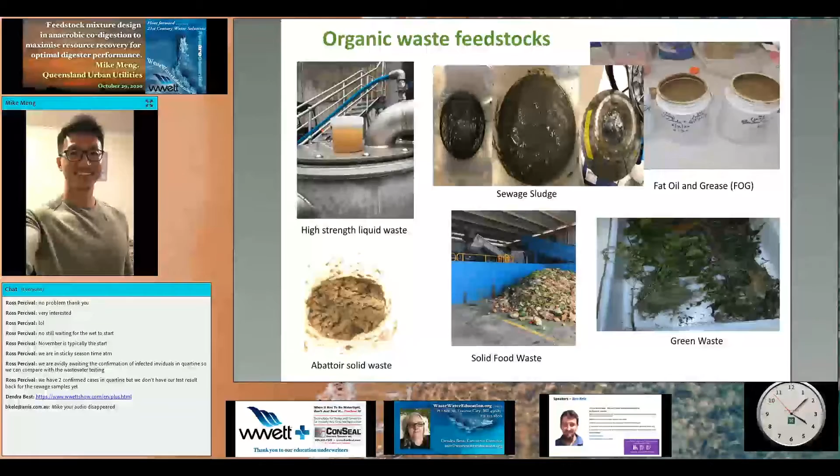And here in Queensland, we've got a lot of abattoir waste from slaughtering cows, and we've got piggery waste as well. So these wastes are all different. They all make their own in terms of composition and quantity. And we need to do something about it. So importantly, to deal with the organic wastes, we need to stabilize them, because otherwise it will cause a lot of environmental issues and they won't be used as a useful product.

Currently in Australia, according to the National Waste Report, there is about 14 million tonnes of organic waste generated each year, and 50% of the organic waste actually ends up in landfill. And interestingly, out of the 14 million tonnes of organic waste, 50% is food waste and garden organics. Like the previous slide showed, these wastes are really diverse in quantity and quality.

Many technologies exist to stabilize or treat the organic wastes. High rate anaerobic digestion, aerobic digestion, lime stabilization, conventional anaerobic digestion, composting, just to name a few. But out of these technologies, anaerobic digestion and composting are typical. Anaerobic digestion is our focus of this talk, and this is something I've done a lot of research on. Compared to composting, it is a more controlled engineering process because of the need to capture the renewable energy and the need for dealing with the downstream digested material.

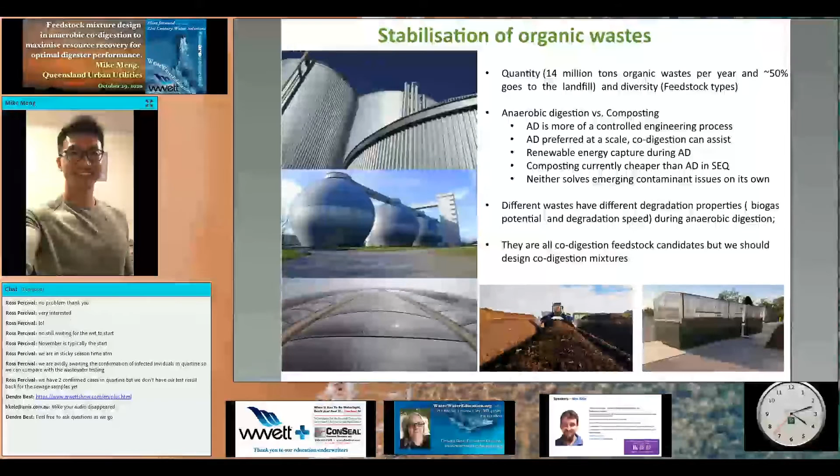In terms of anaerobic digestion, different wastes have different degradation properties, normally characterized by the gas potential and the degradation speed during an anaerobic digestion process. They are all kind of co-digestion feedstock candidates, and we need to design co-digestion mixtures to enable the best outcome possible during the digestion process. Here, I just want to briefly introduce what anaerobic digestion and co-digestion are.

So anaerobic digestion is basically a microbial process, as the image to the right shows, with colorful microbes captured. For the sake of this presentation, I won't go into too much detail about what each type of bacteria and archaea are doing in anaerobic digestion. Instead, I just want to categorize them into bacteria and archaea. They are responsible for different metabolic steps in anaerobic digestion.

So in a digestion process, there are four typical anaerobic metabolic steps: hydrolysis, acidogenesis, or interchangeably fermentation, acetogenesis, which converts organic acids into acetate, which can then be used by archaea or methanogens to be converted to methane gas. So biogas is the end product of an anaerobic digestion process, but it starts from a complex composite feedstock or substrate and goes through a series of these metabolic processes to produce the end product.

So co-digestion, as the name suggests, is a simultaneous treatment of two or more feedstocks in one centralized digestion facility. And the impact of adding an additional feedstock to a digestion process is increased organic loading rate of a process. And by doing that, when we add additional feedstock to a digestion process, if the microbial capacity of the system is fixed, the microbes have to work harder to process the waste to produce methane.

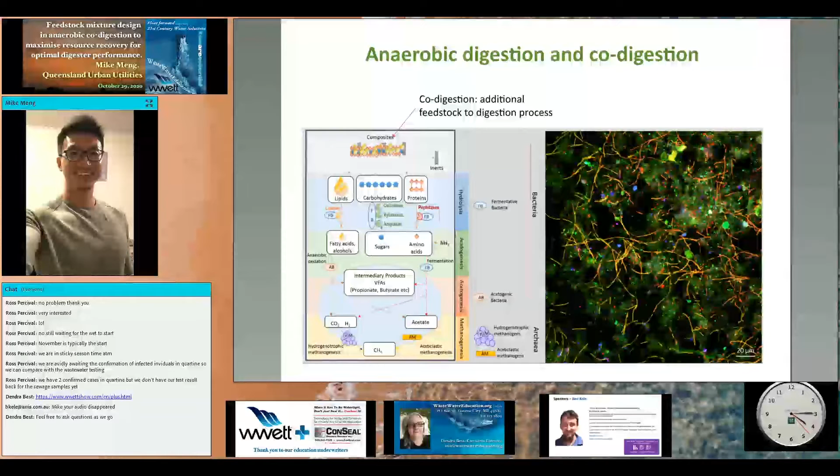And what this also means is if we add too much of the feedstock without doing co-digestion mixture design, we might overload the system. Another impact of adding additional feedstock to a digestion process is it tends to reduce the sludge retention time of a process. If we reduce it to a level where it's below the critical SRT of the system to properly stabilize the feedstock, it might have a negative impact on the microbial process and cause washout of the microbes as well. So yeah, this is an overview of the digestion and co-digestion process.

So I guess the key goal of feedstock mixture design in anaerobic co-digestion is strategic selection of different types of waste. And also sometimes when we have limited feedstock types available, because of availability issues, we need to know the optimal volume of that particular feedstock we can add to the process in order not to overload the system.

I guess the biggest advantage of co-digestion is to leverage existing infrastructure capacity of a digestion system and enhance the biogas production, which can be utilized in different ways, such as generating electricity and heat, which is a typical practice in Australia. And also there are green energy incentives in many parts of the world to use the biogas for higher value rather than just electricity.

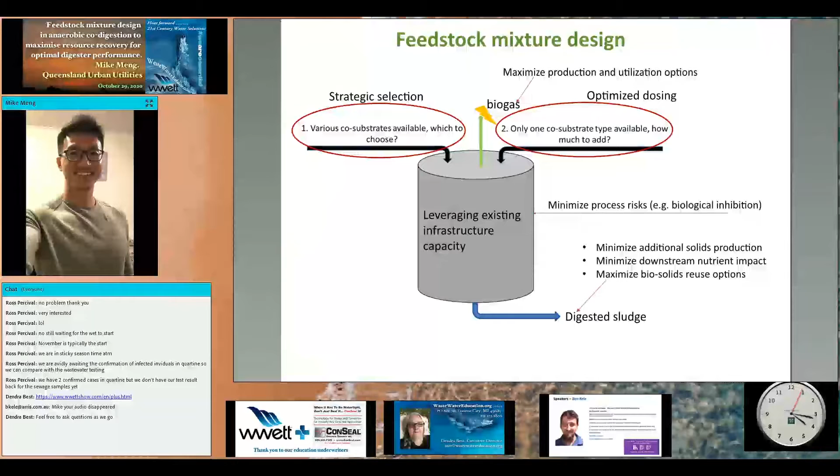So I guess the goal from the process perspective is to minimize biological inhibition risk by adding various amounts of feedstock to an existing digestion process. The goal here is to minimize additional solids production out of the digestion process. It also needs to minimize downstream nutrient impact. But at the same time, through co-digestion, we want to maximize biosolids reuse options, which is a big driver for many of the utilities here in Australia to do co-digestion. I'll give you the example a bit later on how we do it here at the utilities.

In terms of digestion speed, if we have a fixed volume of digester on site, we want to make sure the digestion speed of a feedstock is quick enough so we can achieve enough stabilization during the process. But they are very, very different from feedstock to feedstock. We definitely need to capture that dynamic nature of the substrate to make sure it's compatible with the existing operation.

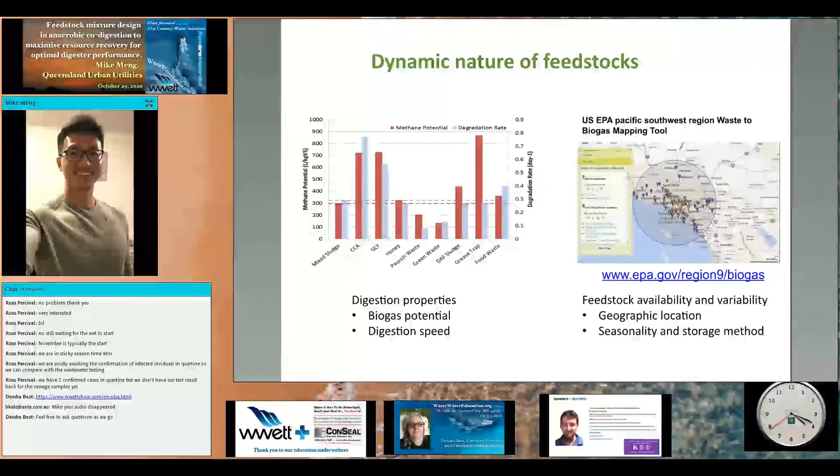And of course, seasonality is a big thing in feedstock selection, because in different seasons we have different compositions from, say, food waste. And if that food waste is stored in some way and not transported to the plant in a timely manner, it might cause a change in the feedstock composition and then change the digestion performance of that particular feedstock as well. So these are all the factors we need to consider in a co-digestion mixture design process.

Here, the diagram might look a bit complicated, but it shows the feedstock design method. I categorize the method into four key areas. So first is the substrate property management, where we try to understand what the feedstock is.

We normally do that by physical characterization. We want to measure the particle size, we want to measure how flowable the substrate is, if it's compatible with the existing operation. And we also want to quantify the chemical compositions in that feedstock. And in particular, we want to see if we can get a decent amount of biogas out of the waste.

And secondly, through the previous screening in step 1, we want to do co-digestion mixture design, because co-digestion mixture always involves adding an additional stream to the baseline substrate feed, which means we design a mixture to enable the optimal digestion process. So that's a consideration. That's where my PhD research was focused on, and we'll talk about it in more detail later.

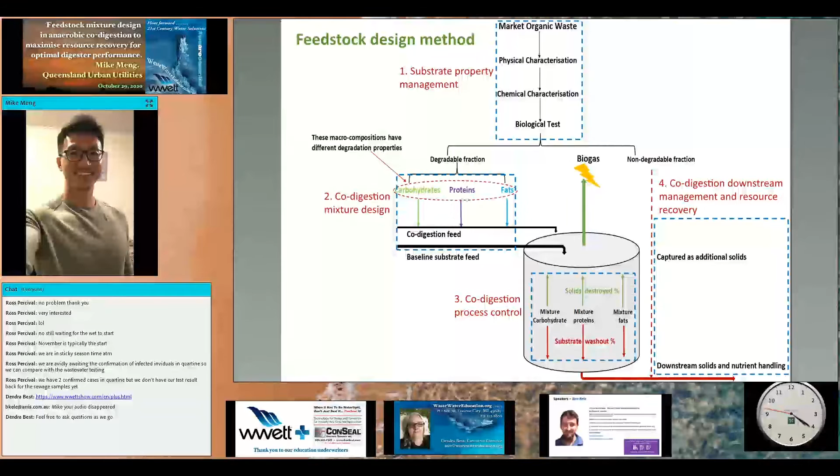And in the digestion process, what essentially happens is the designed co-digestion feedstock mixture gets destroyed and forms biogas, which is the product we want. And whatever is not destroyed will be washed out of the system and be part of the downstream solids handling process and nutrient handling process. And importantly, the degradable fraction of the waste is really important because AD, anaerobic digestion, is a biological process. Whatever portion that is non-degradable will end up in the biosolid stream as well.

Biomethane potential testing is an effective way that's widely used to quantify the biogas potential of a waste. It occurs in various sizes of sealed bottles, as the picture on the top shows. In terms of what we add to a BMP test, the graph below shows the content of a BMP test. Normally, we introduce a mass of inoculum or microbes to do the job in a BMP test. And then, depending on the ratio we want, we add a certain mass of sample. We might need to dilute it by adding a bit of water, leaving the head space for gas sampling.

So what we do in a BMP test is we periodically take a biogas sample out of the head space and run it through the gas analyzer to tell us the biogas composition and development during the test. From the BMP test, we hope we can get graphs as shown to the right. The graphs show the BMP curves from different types of waste. Again, they look very different. I just want to introduce a couple of examples from here. So, for example, the top graph,

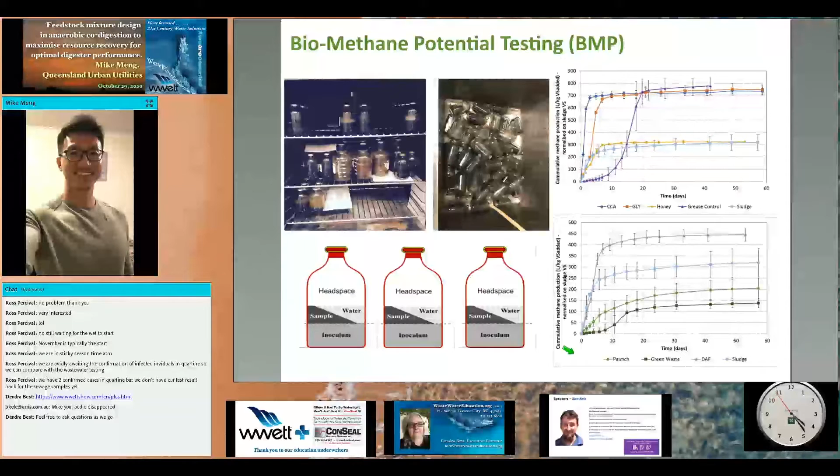I guess one matrix we look at is substrate macro compositions. So substrate macro compositions are the carbohydrate, protein, and lipid compositions in the waste. So different wastes are made of different portions of these macro compositions. They digest very differently in AD processes. For example, carbohydrates are metabolized during the AD process, forming organic acids quite quickly. And if we add too much carbohydrate in the digestion process, it tends to acidify the digestion process.

Whereas for protein, during protein digestion, it releases free ammonia, which is a known toxic material to anaerobic microbes. And too much protein in a digestion process can cause what we call free ammonia inhibition, and it can intoxicate the microbes by penetrating into the cell membranes and make them stop working.

Lipids is another important composition in waste. As well as forming organic acids during lipid digestion, it also forms something called long-chain fatty acids. It tends to be sticky onto the membrane cell wall of the microbes and inhibit the mass transfer during the digestion process. But all these different macro compositions, carbohydrates, protein, and lipids, give us a good simplified matrix to study anaerobic co-digestion processes because it's less complicated than different waste types, food waste, FOG, green waste, which are made up of these different portions of these compositions.

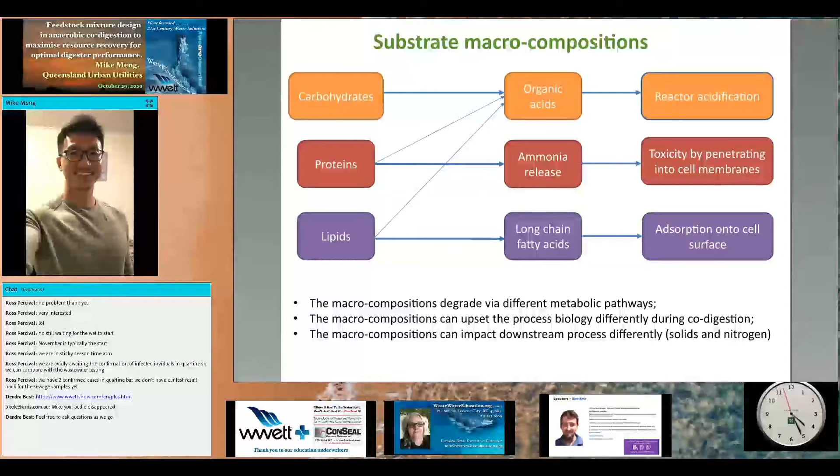In terms of how each of the macro compositions behave in a BMP test, here is a graph. So as we can see, the sewage sludge, which is the byproduct of a wastewater treatment process, has a moderate biogas production in a BMP test. Carbohydrate seems to be a little bit less than the sewage sludge in terms of the biogas production. Protein actually on its own can produce more biogas than sewage sludge, and it tends to digest faster, as shown by the slope of the curve, steeper than the red or the sewage sludge curve. But lipid is a really energy dense material that can give us a really decent amount of biogas production in the BMP test.

But again, the goal here is to quantify, if we have a complex waste added to sewage sludge, what will happen, because it's made up of a different mix of lipid, protein, carbohydrate. And the limitation of a BMP test is that it is a shock load test. As I said before, we just add a certain mass of substrate into a bottle. Whatever we add will sit in the bottle and has to be processed by the mass of the inoculum or the microbes in the bottle. If we add too much, the microbes have no choice but to take the time to adapt and process it to produce biogas.

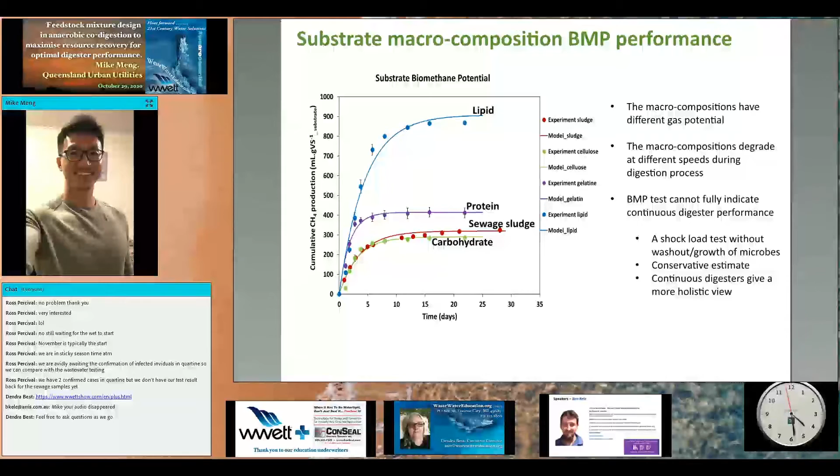So a continuous digestion trial is definitely a big part of my PhD. Here the picture shows the toys I had fun with for 650 days during my PhD. I ran these lab scale, bench scale digesters for 650 days, 4 of them. So there was one sludge digester and 3 co-digestion digesters. In the co-digestion digesters, I had the same amount of sludge substrate, and in addition to the sludge substrate, I added a controlled amount of either carbohydrate, protein, or lipid to be used as a matrix of the waste compositions.

So the goal here is to progressively overload the system to find a maximum loading rate. So for industry, it's really important to know how much of each of the feedstock we can add. Is there a sweet spot in a process where we know how much we add to maximize the profit and digestion benefit in various ways? And also from this experiment, I wanted to quantify the process impact of different macro compositions, namely carbohydrate, protein, and lipids. A big goal of this trial was also to inform industry applications. We were working with water utilities and meat industries here in Australia to tell them what feedstock would be the best type and how much to add to enable benefit.

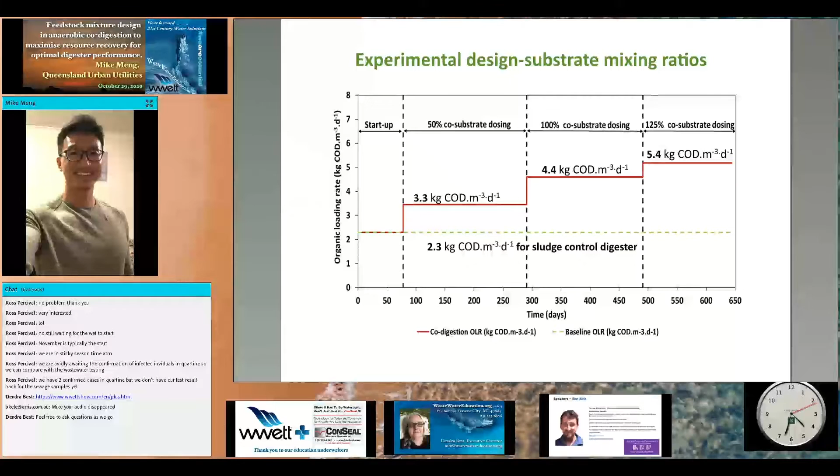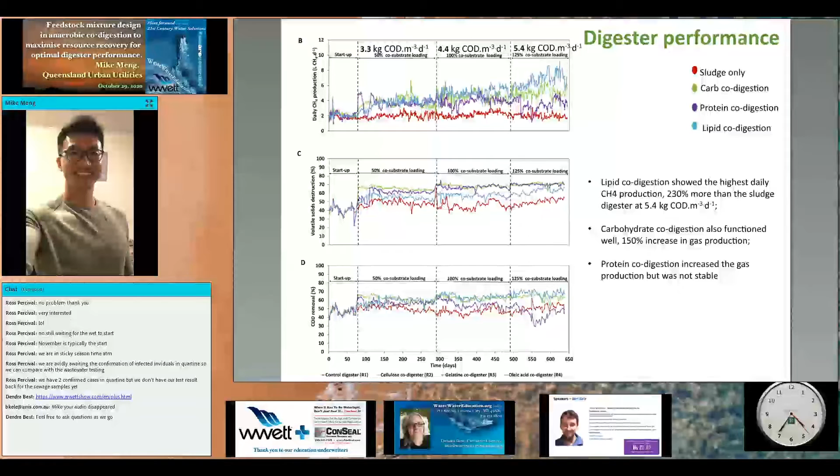And if you look at the axis showing the time series of the experiment, it actually took me 500 days to see a decent amount of biogas produced from the lipid process. This is interesting to me because it means the microbes are really amazing. They were magic. But the anaerobic process might respond really slowly to additional load of substrate. We need to give them time to adapt to that. But once adapted, we can realize a lot of benefit in biogas production.

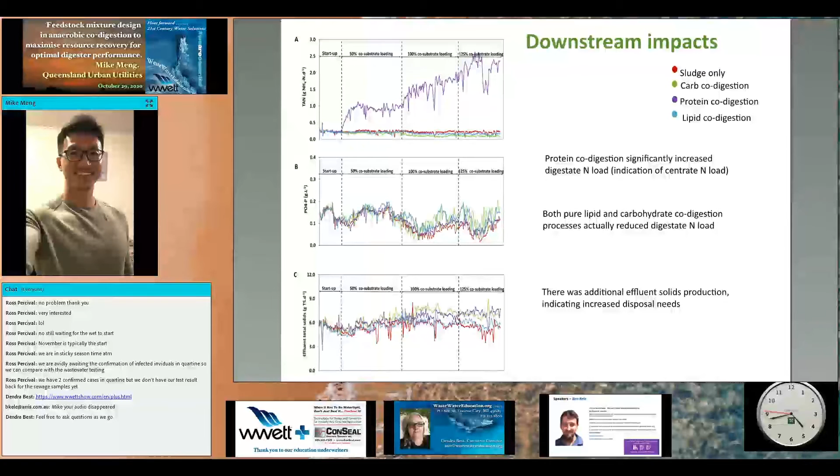So I guess another interesting finding is from the financial aspect. The feedstock financial analysis basically showed that the financial returns of adding a feedstock are not linear to the loading rates or the amount of feedstock added or the biogas production, because co-digestion is an interactive process where we get process benefit in biogas.

At the same time, it is a business as usual operation for many water utilities here in Queensland. We need to deal with the additional biosolids downstream. We also need to treat the centrate nitrogen and phosphorus. So these are all the cost factors we need to factor in.

And when we did that using typical Southeast Queensland values for the analysis, I used my process data collected from the experiment to do the analysis. I generated the bar charts shown on the top. Basically, it showed for the carbohydrate process, it's not linear to the amount of carbohydrate added to the process, but it was not a significant decrease in financial values either.

Whereas for the protein process, the more protein we added, the more downstream impact we got, and because of that, the financial impact was quite negative. For the lipid process, it was interesting because when I added more lipid at a 100% increase of the baseline organic loading rate, you see the financial numbers show a significant decrease, but it picked back up at high loading rate, and this is because of the microbial acclimatization to the feedstock, and a lot of biogas was generated towards the end of the experiment, or at the highest organic loading rate of the experiment. So that's why the financial returns were the highest for this loading rate.

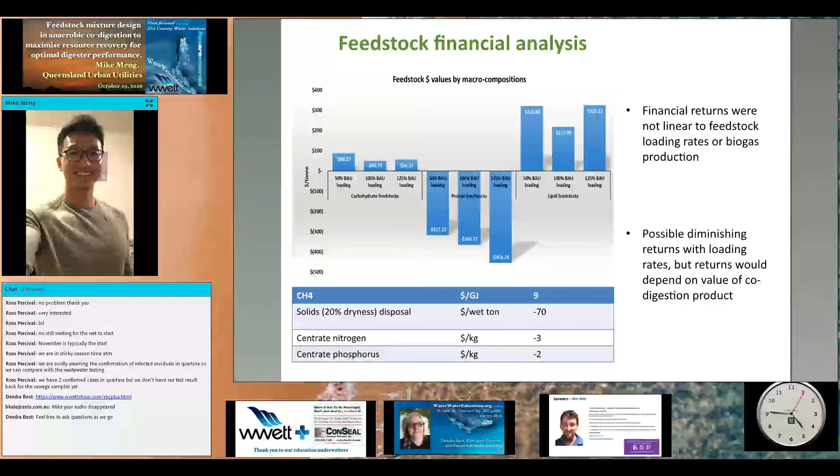So during my research, I used compositionally controlled material added to complex sewage sludge. So in the system, I had a pure lipid source, pure protein source, and a carbohydrate source added to sewage sludge collected from a biological nutrient removal treatment plant. But these studies needed to be validated through a full-scale co-digestion trial to see if the full-scale process would behave the same way. And here we chose a piggery in the regional area of Queensland, which ran CSTR-style reactors for the pig manure treatment process.

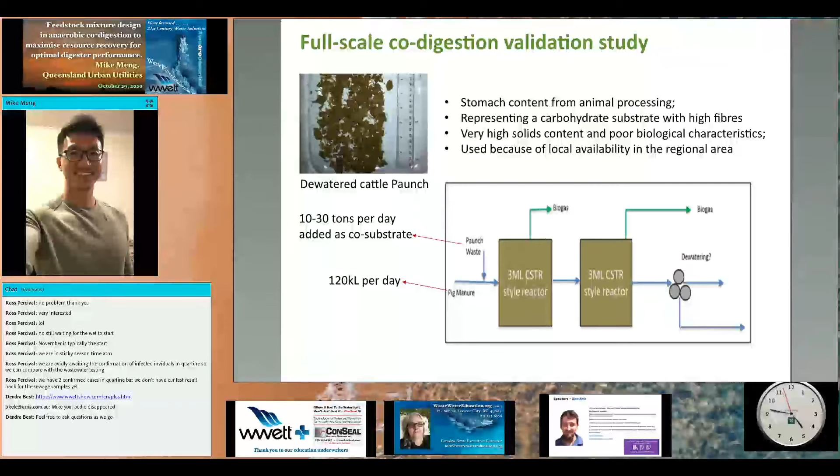And cattle paunch was selected as a co-substrate to be tested here because of local availability. Like I said in the previous slide, it was the only one available at the time of the trial, and logistically it makes sense to transport that material to the plant rather than sourcing better material for the trial. But here, the paunch is stomach content from animal processing. It represents a carbohydrate source with high fibers, and really you can see the photo shows it's very solid. It represented a lot of material handling challenges, and it has a pretty poor biological characteristic, which I will show in the next slide. But in the trial, on a volumetric basis, we added 10 to 30 tons of paunch per day to 120 kiloliters of the pig manure in the process.

Pig manure has pretty high nitrogen content in it, and this means the biological inhibition risk from this material is also high. But still, we chose cattle paunch to do the trial, first for availability reasons, and second, in terms of composition, these two materials are quite complementary to each other. Pig manure features high nitrogen, relatively low carbon, but cattle paunch is normally high carbon, low nitrogen, which can dilute the nitrogen and mitigate inhibition risk in the pig manure. And we did the trial. We increased the pig manure reactor loading rate by about 50% by adding paunch.

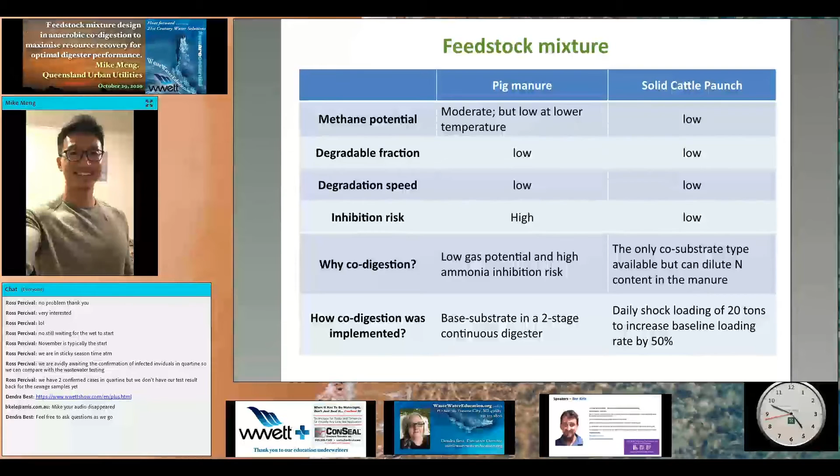In the next slide, I want to talk about digester foaming and loading rate. So during my research, I didn't see any foaming issues from the macro composition long-term experiment, because I did a long-term experiment with a fixed loading rate. I controlled the loading very carefully, and also those co-substrates, carbohydrate, protein, fats, were compositionally controlled. So it didn't represent a complex substrate mixture, whereas digester foaming tends to happen at a high loading rate when we digest a complex feedstock. It's a microbial problem. Many people think it has little to do with the microbes, it's just foam on the top of the digester, but the root cause of digester foaming is microbial.

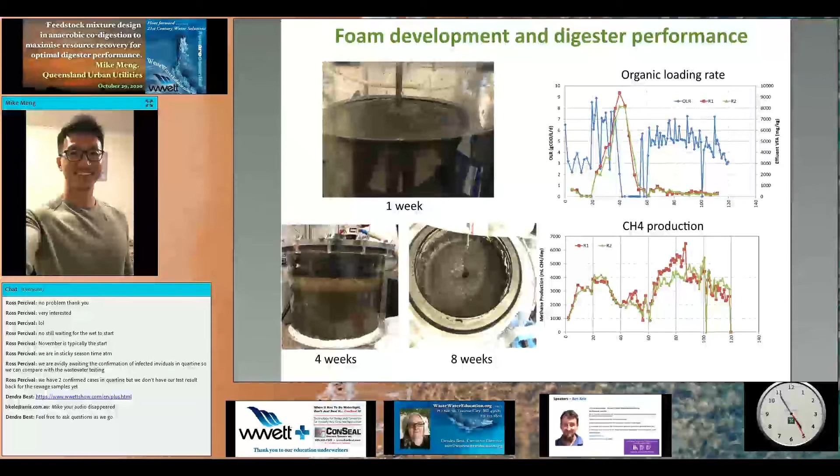But at the same time, if you look at the methane production from the system, it's not good, but the methane production didn't cease, which means you might still get a bit of a benefit of biogas production from foaming digesters, but it's not optimal. So foaming issues are something we need to deal with. So overall, this concludes my learnings from research.

So basically from my experiment and validation studies, I found that lipid or fat was the most beneficial feedstock. The carbohydrate system also functioned quite well, and that was validated through a paunch co-digestion trial. What I also found, and this is probably the most important finding from my PhD, is acclimatization of microbes means co-digestion capacity increases over time.

So before the PhD research, I read papers about loading limits and all sorts of textbooks about how much of a particular feedstock we can add to a sludge digester, for example. So textbook numbers are generally conservative. Not saying textbook numbers are wrong, I have a lot of respect for textbook numbers, but they do not consider this acclimatization process in a co-digestion or digestion system, which is really key.

And what I found was if co-digestion capacity is developed microbially, it means we can process more and more feedstock over time and increase the capacity of the biological system in the long run. So that's really important. There are two typical measures for digestion capacity. One is obviously the sludge retention time, and it's normally recommended that 20 days or above are necessary for digesting complex substrate, and I believe so.

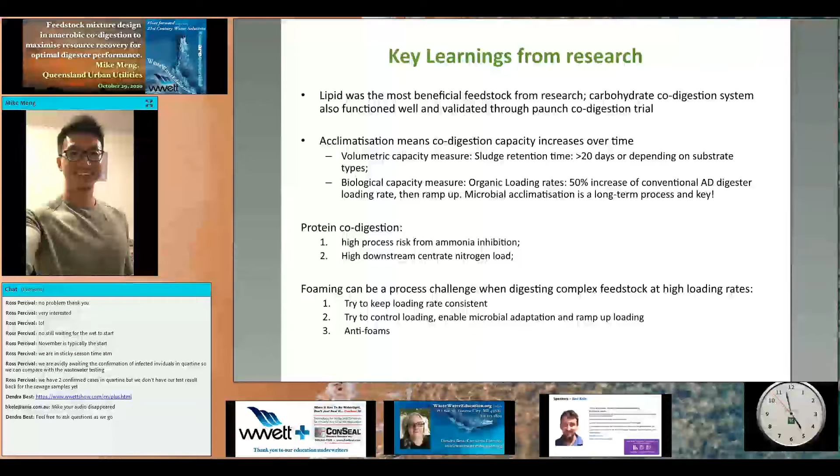Like I said in the previous slide, foaming is a process challenge when digesting complex feedstock at a high loading rate. So to combat that, we should try to keep the loading rate consistent and control it carefully and ramp it up rather than getting it all over the shop. But once it occurs, it can be solved just by adding antifoams. That's what we do at a full-scale plant.

The second part of the presentation, I want to show a case study at Luggage Point Sewage Treatment Plant, STP. This is a plant where I spend most time now. I work at the plant as a resource recovery engineer. Just a bit of an overview of the plant. It's the second largest in Australia, 750k equivalent population. It treats about 130 megalitres per day annual dry weather flow.

So the mainstream process, as you can see, runs a series of bioreactors in a 5-stage biological nutrient removal plant. And at the plant, we are actually currently building a side stream anammox that treats the centrate nitrogen from the digestate, from the centrate through our dewatering system.

I like digesters, so on site we've got 6 conventional anaerobic digesters. As you can see, the round stuff to the left. You might count 8. There are 6 sealed anaerobic conventional digesters and 2 are storage digesters, which are open, so exposed to air. So we run the sludge through the 6 conventional digesters, and digested material coming out of the digesters is kept in the 2 storage digesters before feeding the centrifuge for dewatering.

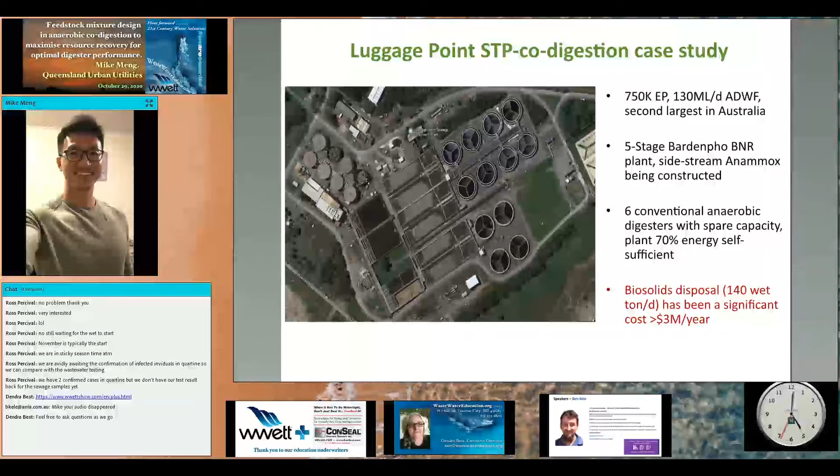Here we do have a co-digestion facility at Luggage Point. The picture shows what it looks like. It's a concrete tank that has an unloading system that consists of a strainer filtration system that prevents rags and rocks and any unpleasant material from coming through. It protects the pump, but after the material goes through the filtration system, it gets unloaded by the centrifugal pump, feeding what we call the receival tank. It's a small concrete tank in the background.

You can see here. And without the material being kept in the tank, we feed the digesters straight away in a shock loading format. You might think, why don't we stabilize or let the material sit in the tank for a bit before feeding the digesters? There are practical reasons. One is odour. The other one is the tank is actually not big enough. It's 10 cubes. One truckload is normally 20 cubic meters or kiloliters. So yeah, we need to start feeding the digesters the moment we start feeding the unloading tank.

So in terms of what we co-digest on site, we process about 60 kiloliters of liquid waste in addition to our mixed sewage sludge. And from co-digestion, the biogas production contributes to about 10% of total biogas produced on site. And like I said, the current unloading system has limited balancing capacity, which means the digesters have to be shock loaded, which can cause process risk. It can happen, but we need to optimize feeding strategies to make sure the feedstock mixtures can be trickled in to produce gas when we need it the most.

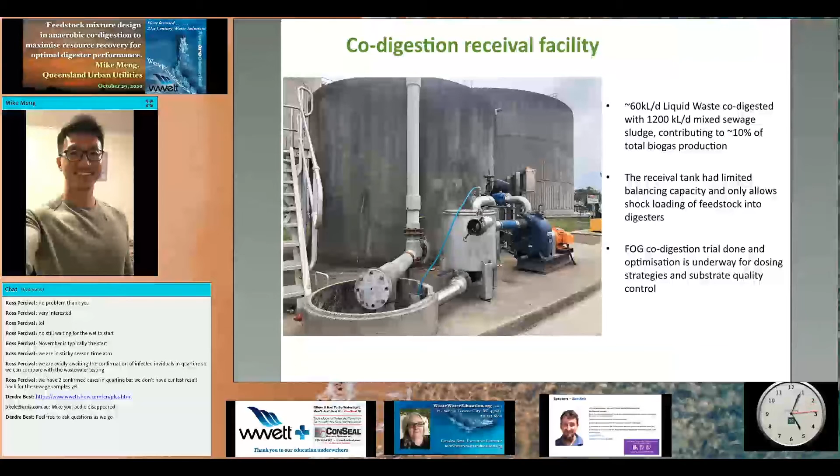I want to talk about the biogas value and the biosolids management issues that we face. These are the two practical issues we face at full scale. Biogas is valued differently from country to country. Even in Australia, there will be local differences in how biogas is used and valued. We've done analysis on different feedstocks and different volumes and how much biogas each feedstock can produce. That's quite clear to us.

For example, if you look at the pie chart, 3% of the market-available FOG volume will give us a 12% increase in biogas, which is something we really like, but we really need to unlock our biogas value issues, because we have two areas that stop biogas values being increased. One is we have quite cheap electricity on site, a quite cheap deal from our energy retailers. So converting more biogas to electricity actually costs more than buying it from the retailer.

A second issue is our cogeneration unit is at capacity at the moment. We're trying to bring in a larger cogeneration unit to produce more electricity and increase the biogas processing capacity. There are also some higher value gas use options being considered. We want to use the biogas to dry our biosolids and achieve better dryness, which means less biosolids disposal volume, and we can run the digesters hotter using the waste heat from the cogeneration unit. These are options being considered as part of the resource recovery program we are initiating.

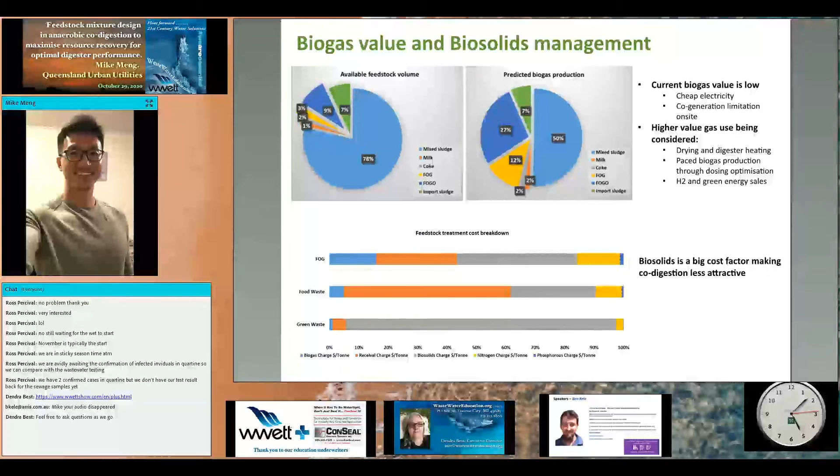The bar chart at the bottom shows the feedstock treatment costs from the co-digestion model I generated for Urban Utilities. The grey bars show the biosolids handling is a big cost factor. It's really expensive to get rid of the biosolids, and we knew by adding more feedstock, there will be undigested material adding to the biosolids volume we have to deal with. The goal is to minimize the grey bar in the chart. We'll talk more about biosolids handling in the next slide.

Biosolids management is key to our full-scale co-digestion because co-digestion is a really interactive process. Currently we run centrifuges quite hard to dry the digested material from the storage digesters, achieving about 20% dryness at 140 wet tons per day. This corresponds to 3 million in trucking costs per year. We don't want that. We want to make the biosolids drier and less volume.

So we've got a project looking at agricultural-type stockpile drying, which takes the dewatered cake from the centrifuge process, spreads it on the drying bed, does a bit of wind blowing and lets the sun do the job. By doing that, we estimate we can significantly reduce the biosolids volume produced from our process, and that unlocks co-digestion potential significantly as well.

That's not the end product from the drying bed. We're also looking at using the 70% or more dried biosolids for a further biosolids handling process, which is pelletization. So we've got a pelletization plant at Luggage Point. So pelletization processes,

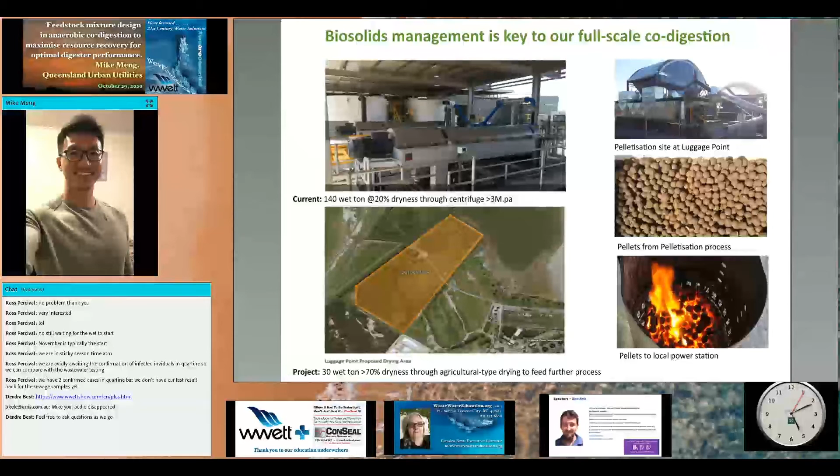But through this burning process with the power station, the attractive aspect is it eliminates the PFAS and microplastic issues, which can be regulated soon here in Queensland. One existing project we are doing is a FOG dosing optimization project. As previously discussed, it's a shock loading versus distributed feeding project.

The charts to the left show the two feeding strategies of FOG material to our digesters. As you can see, we set the limit indicated by the red line here. If it takes 3 truckloads of FOG at each point, and if we feed the material as is through our existing tank, it will exceed the feeding limit because there will be too much FOG in too short a period of time, which might cause biological inhibition issues and really compromise the biogas production. That's not what we want.

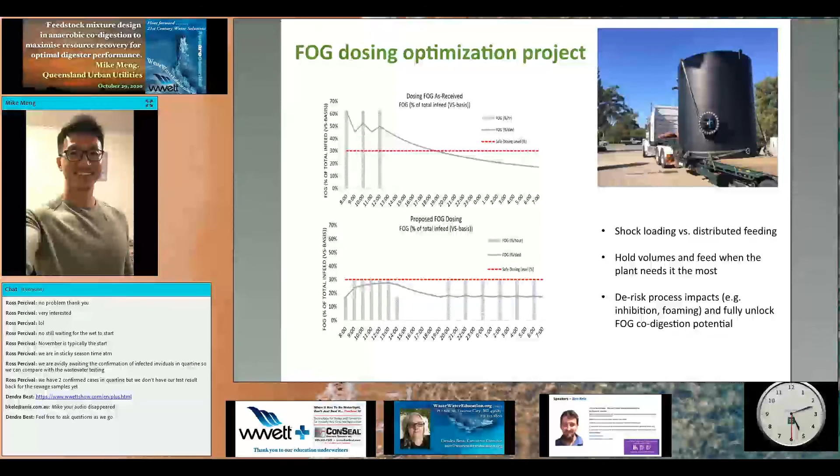What we want more is the graph down at the bottom, where we optimize that energy profile throughout the day by dosing the FOG. Really, we spread the volume out throughout the day and dose it bit by bit to when the plant needs it the most. But to do that, we need to integrate a larger volume balancing tank, as shown in the photo here, to add to the process. That way we achieve a more sophisticated balancing system that can do the job.

We do a lot of co-digestion on site, which means a lot of material handling issues and a lot of substrate quality management on a day-to-day basis. So we've got big digesters to support anaerobic digestion that have a lot of unutilized capacity. We want to fill them up as much as possible, but substrate quality management is really important.

As you can see, truckloads come in every day. We need to manage truck movement on a daily basis, and what's coming out of the truck can be really unpleasant day to day as well, as the bottom pictures show. So there's a lot of material handling for our operators and for myself, and there's a lot of communication with the waste management companies and transportation companies as well, to make sure the product can be delivered on time with the right quality and quantity.

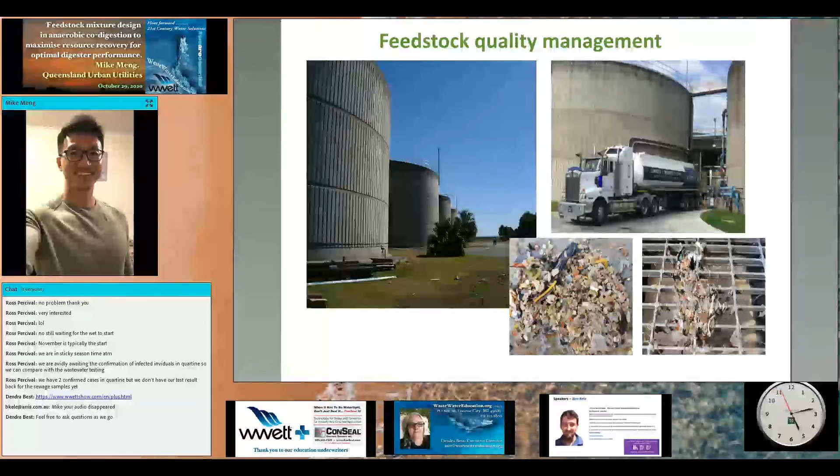We've got waste acceptance criteria that help us select the best quality of substrate, but still there is a lot of inconsistency in the quality of the substrate day to day. One way to control substrate quality is development of a substrate model. I developed this model with a software engineer.

So basically, we did spreadsheets where we modeled all the different substrate mixing ratios and defined our digestion capacity. At the same time, we quantified all the downstream impacts from doing different types of co-digestion activities. What the software engineer then did was present the calculated results in a more user-friendly format.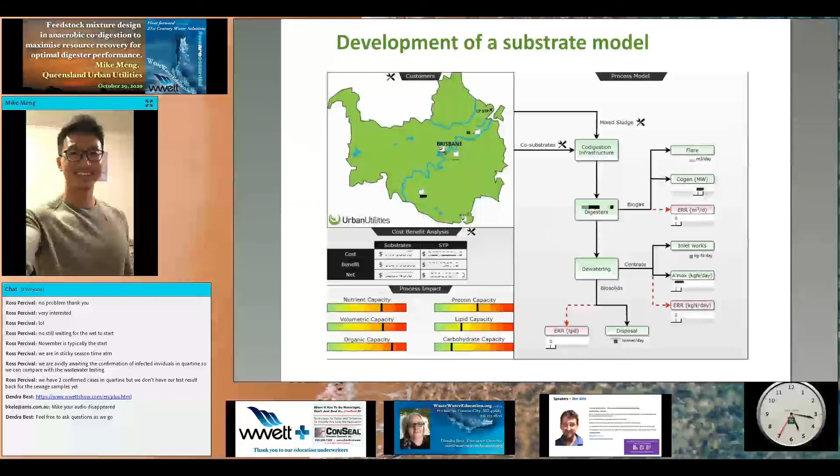And in the expanded resource recovery program, we also look at using stripping technologies to deal with more elevated ammonia levels in the centrate to enable recovery rather than just treatment. We realize the recovered nitrogen might have better fertilizer value in the market. This is an ongoing project.

Here, just to summarize our pathways in co-digestion in Queensland, it's driven by both internal and external factors. So here in Queensland, we now have the landfill levy that introduces a higher fee for waste going to landfill. This is good news for co-digestion because financially it makes more sense for redirecting the waste away from landfill for beneficial use, which is a good environmental outcome as well.

But to do that, we are trying to debottleneck the biosolids issues and emerging contaminant issues to allow us to do more and more co-digestion. And renewable energy is a big one as well. There are a lot of environmental drivers for us to do that. But if you look at the diagram here, we have to deal with that sludge every day. That's our business as usual practice.

Co-digestion of liquid is full on at the moment. We digest a lot of liquids, and we realize liquid digestion makes a lot of sense operationally because liquid is easier to handle than things like fat, oil and grease and solid food waste. But we're looking at unlocking more capacity of co-digestion through enabling biogas value and the biosolids management. So by doing that, we really want to do more fat, oil and grease and solid food waste co-digestion. There are trials and optimization projects going on.

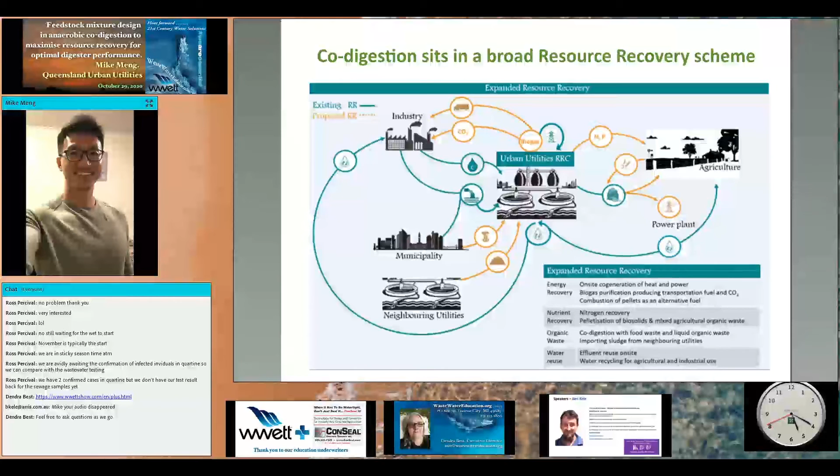Agriculture is an important factor for our co-digestion journey and resource recovery in general as well, because all the digested material treated further in some way hopefully can be used by the agricultural sector for beneficial reuse. But here, without going into too much detail of each of these activities, what I want to say is co-digestion is really interactive. It needs to be considered in a more holistic view. And this is also my point for my concluding slide, the first point.

It's highly interactive. And at different plants, there might be different process bottlenecks. It can be simple things like the pumps and the filters being not compatible or too much material handling, or it can be a larger issue such as the biosolids issues we face. It's not necessarily a process capacity issue. We might have the largest digester in the world, but it doesn't mean we can put in a lot of material for co-digestion simply because the downstream process might not make sense.

And to do that, feedstock quality control through acceptance criteria is really important. In our criteria, we have the typical chemical compositions such as TS, VS, chemical oxygen demand, things like that. We also have heavy metals and emerging contaminants, which are really big issues moving forward.

These things need to be addressed for co-digestion to be unlocked. And material handling is a big part of day-to-day operation. It's really important. And lastly, I want to say that the water industry in Australia is transitioning into the full spectrum of resource recovery with both internal and external drivers. So these are really important for us.